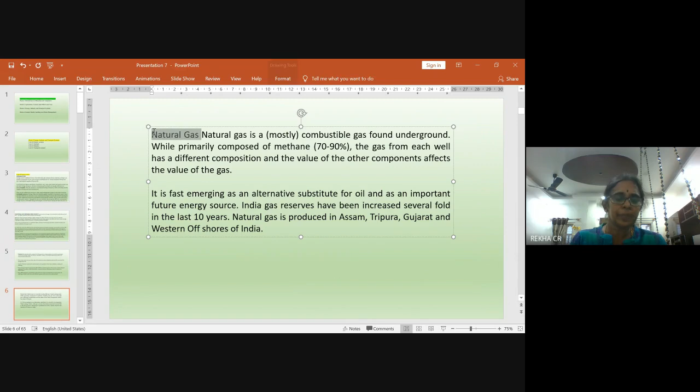So the third one is natural gas. Natural gas is a combustible gas found underground, and it is primarily composed of 70 to 90% methane.

So, the gas from each well has a different composition, and the value of other components affects the value of gas. So, this natural gas is a fast emerging alternative substitute for oil and an important gas or energy source for future. So, India's gas reserves have been increased several fold in the last 10 years, and the natural gas is produced in Assam, Tripura, Gujarat, and western offshores of India.

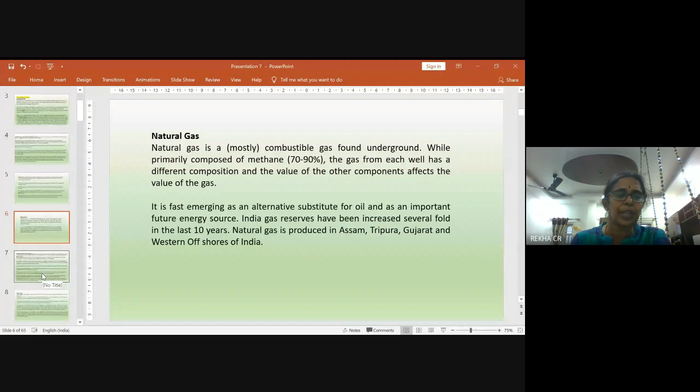So next coming to the renewable energy technologies or renewable energy sources. So the one which we studied is the non-renewable. So the renewable energy sources, it can be renewed like solar energy, wind energy, geothermal energy, tidal power, hydroelectric power, biomass, etc. So the first one is the wind energy.

Of course, it is an important alternative technology due to the developments in the turbine technology. The power generated from the wind-based turbines has increased significantly. So wind energy is one of the clean and sustainable energy resources. So though the windmills are utilized for energy generation, the development of wind energy or the new windmills, which are also called as wind turbines, appeared as early as 1890.

So today, the wind generated electricity is very close in cost to the power from conventional utility generation in some locations. So here in wind energy, the wind turbines use the kinetic energy of the wind and convert it into mechanical energy, which is converted into electricity by a generator. So large windmills are generally grouped together in a windy area, which is called a wind farm. So the windmills in a wind farm make it easier to feed the produced electricity into the power grid.

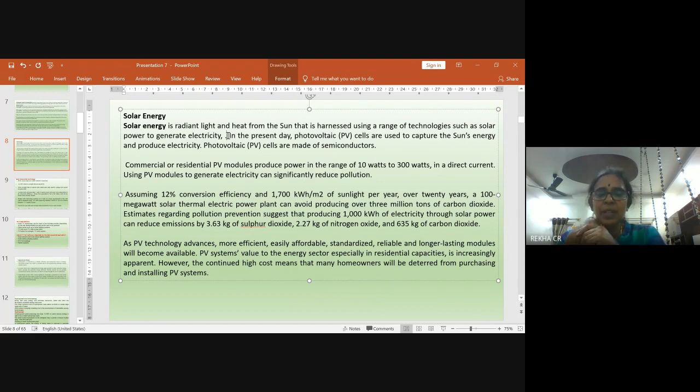So it can significantly reduce the pollution. So regarding pollution prevention, it suggests that producing 1000 kilowatt hours of electricity through solar power can reduce the emissions by 3.63 kgs of sulfur dioxide, 2.27 kgs of nitrogen oxide, and 635 kgs of carbon dioxide. So as PV technology advances, more efficient, easily affordable, reliable, and long-lasting modules will become available. So PV systems' value to the energy sector, especially in residential capacities, is increasing.

So next is the photovoltaic technology. Photo means light and voltaic stands for electricity. So SPV refers to sunlight derived electricity. See, when sunlight falls on special cells called solar cells, electric voltage and current is generated. So a single solar cell generates 1 watt of useful power and even more depending upon its conversion efficiency. So the power thus generated is fed to the battery and can be drawn whenever it is required.

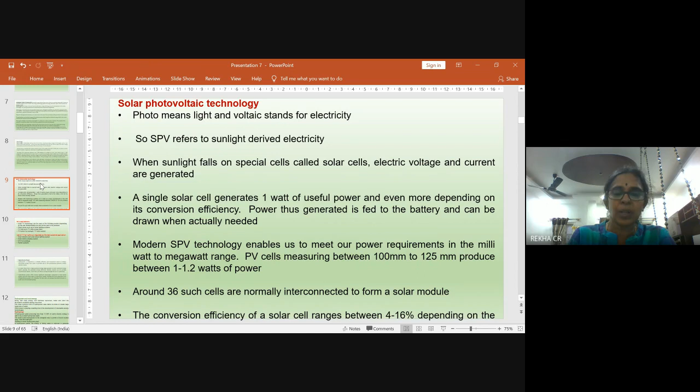So SPV technology enables us to meet our power requirements, and the PV cells measuring between 100 to 125 millimeters produce between 1 to 1.2 watts of power. So usually 36 such cells are interconnected to form a solar module. So the conversion efficiency of a solar cell ranges between 4 to 16% depending upon the cell technology used.

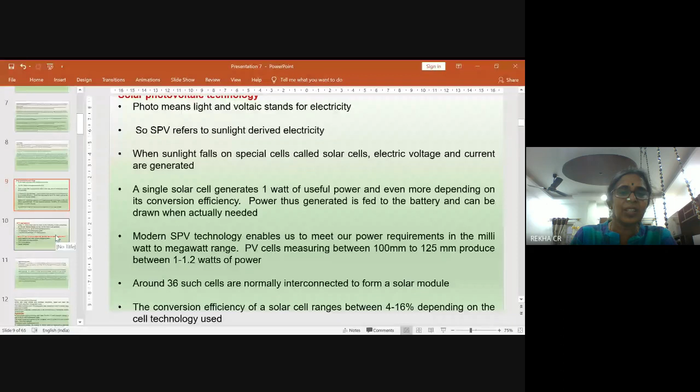So this SPV technology is used depending upon the site characteristics. It can stand alone in home lighting systems, PV grid as in PV utility power plant, PV hybrid, that is PV wind system. So it is used as lighting and it is found as the best possible application in the form of solar lanterns, solar street lighting system, solar water pumping system, SPV for buildings, hybrid systems, etc.

So next one is hydroelectric power. So hydropower is one of the efficient, reliable and economic sources of energy. So harvesting energy from water is possible due to the gravitational potential energy stored in water. So as the water flows from a high potential energy, that is high ground, to a low potential energy, the lower ground, the potential energy difference created is partially converted into kinetic and in this case electric energy through the use of a generator.

So hydroelectric power has several significant advantages compared to fossil-based power, and it is also significant when compared to the other sources of alternative energy. So next one, yes,

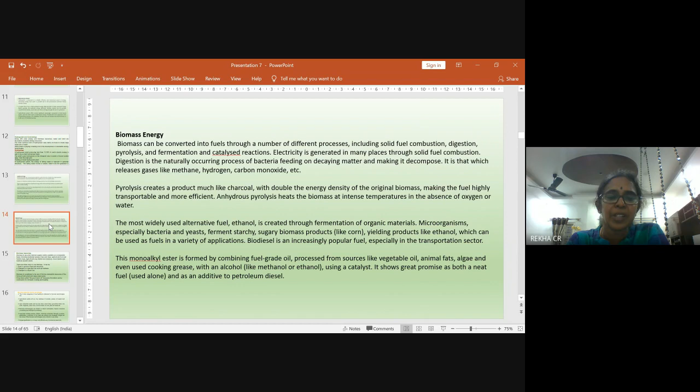So, the most widely used alternative fuel is ethanol, which is created through fermentation of organic materials. Microorganisms, especially bacteria and yeasts, ferment the starch, sugar, etc. It yields ethanol, which can be used as a fuel in a variety of applications. Biodiesel is an increasingly popular fuel, especially in the transportation sector. So these are some of the different types of energy.

So biomass resources: biomass is plant-derived organic matter available on a renewable basis, which includes energy crops and trees, agricultural food and fodder crops, agricultural crop waste and residues, wood waste and residues of aquatic plants. So there are different ways to use the biomass.

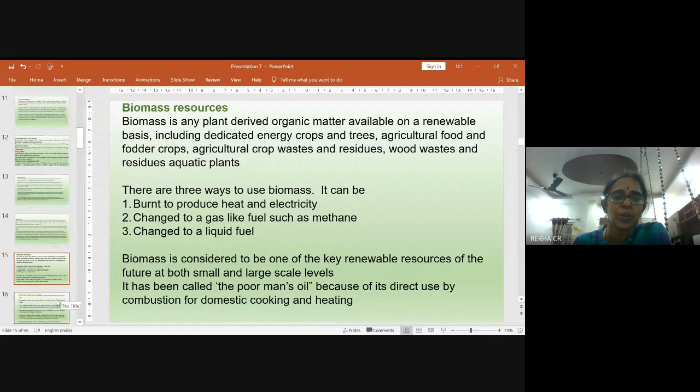It can be directly burnt to produce heat and electricity. It can be changed to a gas-like fuel such as methane, or it can be changed to a liquid fuel. So it is one of the key renewable resources of the future at both small and large scale levels. It has got a number of advantages.

So these biomass technologies are based on direct combustion, thermochemical and biological processing. Improved cooking stoves, boilers, charcoal production through pyrolysis, gasification, production of biofuels like ethanol, biodiesel, biogas, are some of the biomass technologies and products which are used today. Biomass gasification is a cheap and efficient way of producing electricity.

So next one is hydropower, which we have discussed. Along with solar energy and biomass resources, we have water and wind abundantly, which can be used as energy sources.

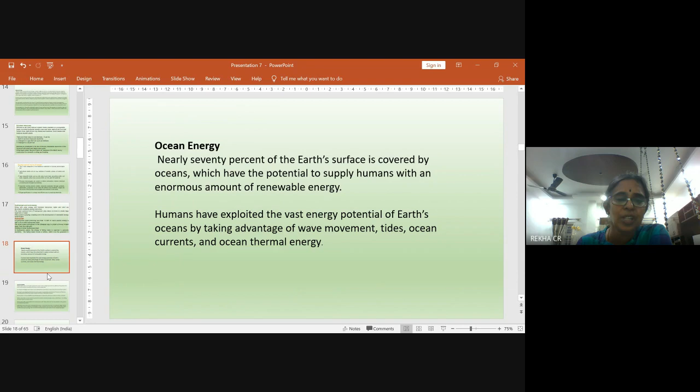So next one is ocean energy. 70% of the Earth's surface is covered by oceans, which have the potential to supply humans with an enormous amount of renewable energy. Humans have exploited the energy potential of Earth's oceans by taking advantage of wave movement, tides, ocean currents, and ocean thermal energy. So next one is nuclear energy.

Nuclear energy is the use of nuclear reactions that release nuclear energy to generate heat, which most frequently is used in steam turbines to produce electricity in a nuclear power plant. Nuclear power can be obtained from nuclear fission, nuclear decay, and nuclear fusion reactions. Presently, the majority of electricity from nuclear power is produced by nuclear fission of uranium and plutonium. Generating electricity from fusion power remains the focus of international research.

So nuclear power is also a clean and efficient way of boiling water to make steam, which turns turbines to produce electricity. Nuclear power plants use low enriched uranium fuel to produce electricity through a process called fission, the splitting of uranium atoms in a nuclear reactor.

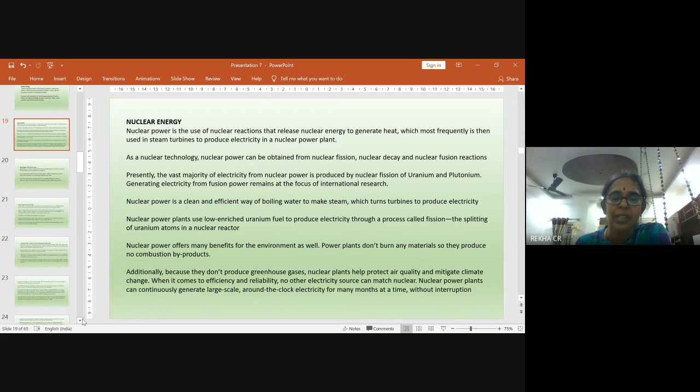Nuclear power offers many benefits for the environment. The power plants don't burn any materials, so they produce no combustion byproducts, and they do not release any greenhouse gases. So it protects the air quality and it mitigates climate change. Nuclear power plants can continuously generate large-scale, around-the-clock electricity for months at a time without any interruption.

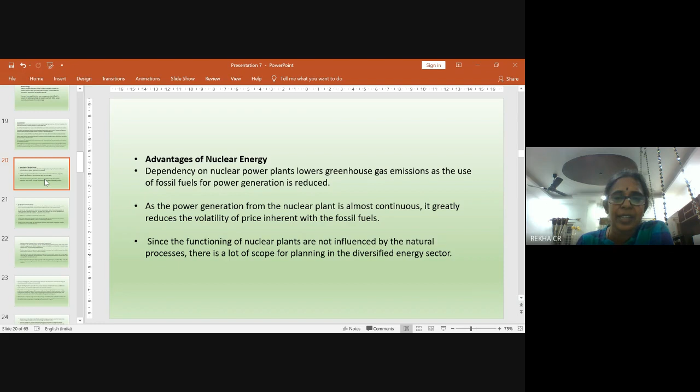So what are the advantages of nuclear energy? Power generation is there 24 hours, and it is not influenced by natural processes. There is a lot of scope for planning and a diversified energy sector, and there is no greenhouse gas emission. So what are the disadvantages?

Disadvantages of nuclear energy. See, fossil fuels are used mostly in road transport and mobility infrastructures, so switching over to nuclear power generation may not reduce fossil fuel use in the transport sector. In spite of all safety precautions in nuclear power plants, there is a probability of nuclear accidents. The nuclear accidents at Chernobyl and Fukushima highlighted the vulnerability of the plants to accidents, particularly due to human error.

Nuclear power plants have a limited lifespan, and the establishment of the plants must be technically feasible and economically feasible too. The use of nuclear energy and establishment of nuclear plants involves dependency on other countries for nuclear fuel and technology.

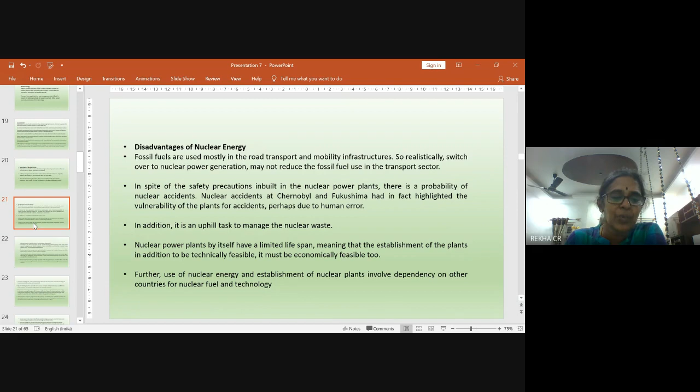So, diversification in energy supplies: perspectives from India. According to the Central Electricity Authority, India's total power capacity is pegged at over 300,000 megawatt, of which 42,850 megawatt is contributed by renewable energy projects and 42,783 megawatt by hydropower projects. Experts from the energy sector are of the opinion that India is very much on its path to become one of the world's leading producers of green energy.

India has diverse sources of power generation ranging from conventional sources such as coal, lignite, natural gas, oil, hydropower, nuclear power, to non-conventional sources like wind, solar, agriculture, and domestic waste. The demand for electricity has been increasing rapidly due to the increase in population. To cater to the increasing demand, massive additions in the existing generation capacity are required. The shift from fossil fuels to renewable energy sources is due to environmental impact, and these sources of energy are clean and sustainable.

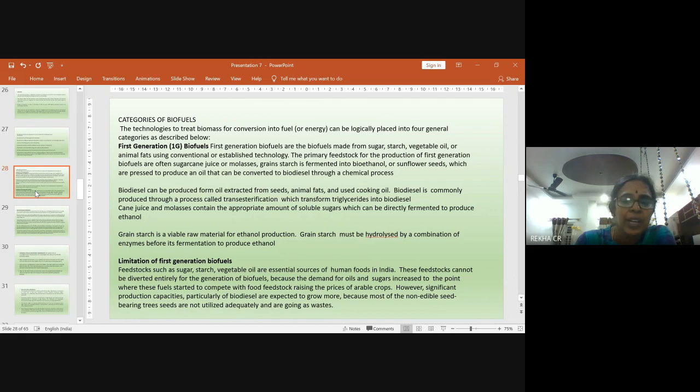However, significant production capacities, particularly of biodiesel, are expected to grow more because most of the non-edible seed bearing tree seeds are not utilized adequately and they are going as waste.

The second one is second generation biofuels, called 2G biofuels. They are produced from non-food crops, which include lignocellulosic biomass, crop residues, or waste biomass in the form of straw and stalks of wheat, rice, corn, etc. Biomass feedstock can be converted into different fuels using a range of processes for cost-effective biofuel production, such as biomethanol, bio-DME, Fischer-Tropsch diesel, biodiesel, mixed alcohol, bio-oil, biohydrogen, syngas, biogas, etc.

So lignocellulosic biomass is one of the most abundant plant materials on earth. It is obtained from farm residues, the organic fraction of municipal solid waste, and industrial and urban residues. The chief fraction of this biomass, typically on the order of 35 to 50%, is a glucose polymer known as cellulose. Next, 22 to 35% is hemicellulose. Depending upon the distribution of these sugars, the biomass also varies. The third most significant fraction, 15 to 25%, is lignin.

So the biomass consists of cellulose, hemicellulose, and lignin, and these components cannot easily be broken down to form sugar molecules. Other compounds such as plant oils, proteins, and ash make up the remaining fraction of the lignocellulosic biomass structure.

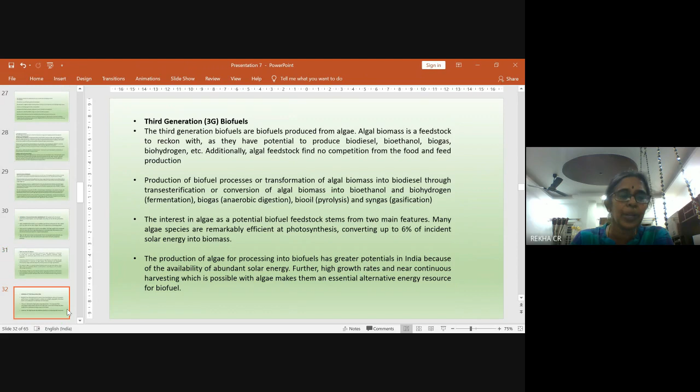So, many algae species are remarkably efficient at photosynthesis, which has the ability to convert the incident solar energy into biomass. So, the production of algae for processing into biofuels has a greater potential in India because of the availability of plenty of solar energy. So, the high growth rates and near continuous harvesting possible with algae make them an essential alternative energy resource for biofuel.

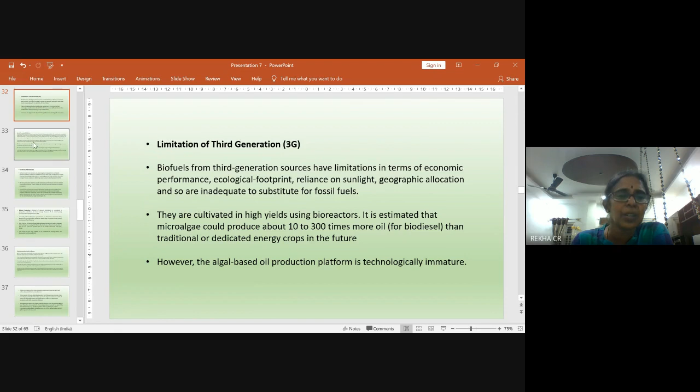So, the limitation for this third generation biofuel: the biofuels from the third generation sources have limitations in terms of economic performance, ecological footprint, reliance on sunlight, geographical allocation, and are inadequate to substitute for fossil fuels. So they are cultivated in high yields using bioreactors. It is estimated that microalgae could produce about 10 to 300 times more oil than the traditional or dedicated energy crops in future. But still, algal based oil production is a technologically immature technology.

So next one is 4G, that is the fourth generation biofuels. The fourth generation biofuels are a step further from the third generation biofuels. It is mostly based on metabolic engineering, a powerful tool to improve biofuel production, either through genetic modification to increase the carbon dioxide capture and lipid production, as well as to develop low input fast growing energy crops with reduced fertilizers, insecticides, and water requirements.

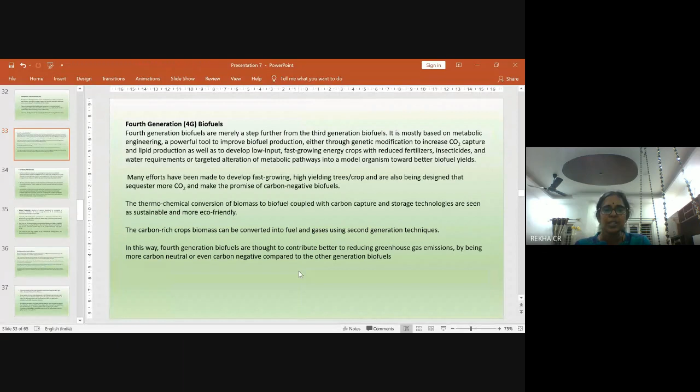Many efforts have been made to develop fast growing, high yielding trees designed to sequester more carbon dioxide and make the promise of carbon negative biofuels. So, the thermochemical conversion of biomass to biofuel, coupled with carbon capture and storage technologies, is seen as sustainable and more eco friendly. The carbon rich crops can be converted into fuel and gases using second generation techniques.

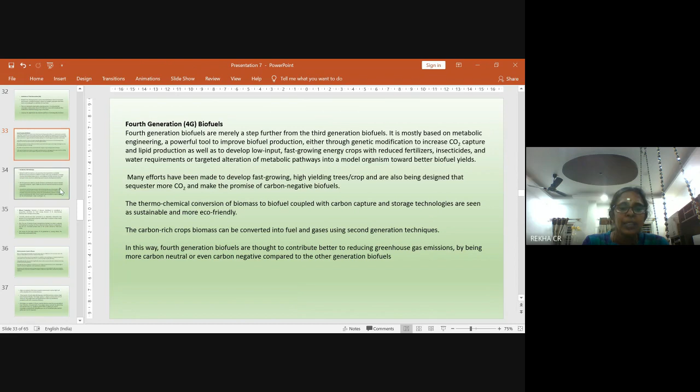So by this way, the fourth generation biofuels contribute better to reducing greenhouse emissions by being more carbon neutral or even carbon negative compared to the other generation biofuels. So biofuels made from biomass are attracting increasing interest worldwide. They can fulfill the energy needs and contribute to energy security, mitigation of greenhouse gas emissions from the transport sectors, and also deliver rural economic development benefits.

So the first generation has specific limitations, and feedstocks used for biofuels, especially the food grains, sugars, edible oil, etc., these food substances cannot be diverted entirely for biofuel production. The second and the third generation technologies have enormous potential because they are produced from biomass feedstock, that is residues and waste materials, and can be converted into varieties of biofuels.

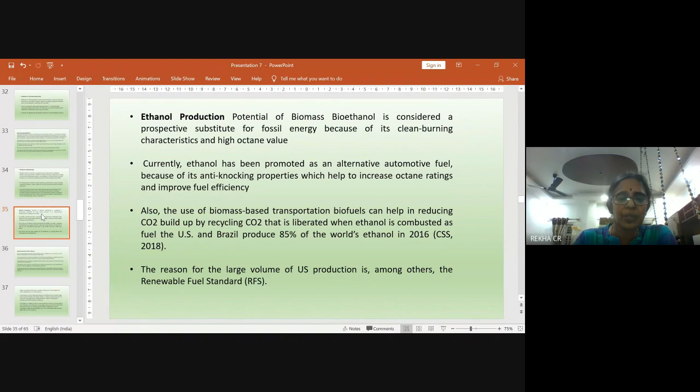So next one is ethanol production. Biomass bioethanol is considered as a substitute for fossil energy because of its clean burning characteristics and high octane value. Biomass based transportation biofuels help in reducing carbon dioxide buildup by recycling the carbon dioxide that is liberated when ethanol is combusted as fuel. The reason for the large volume of US production is the renewable fuel standard.

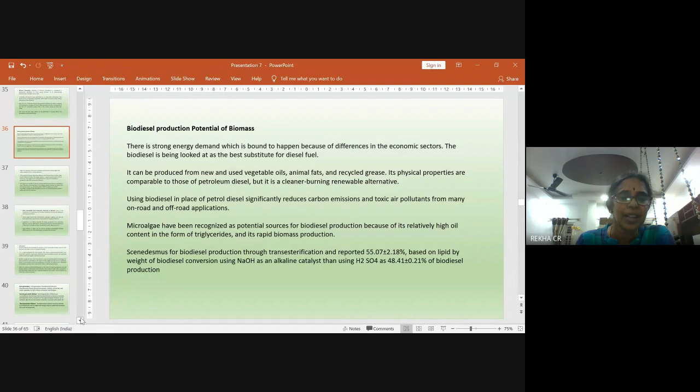So, biodiesel production potential of biomass. There is a strong energy demand which is bound to happen because of the difference in the economic sectors. Using biodiesel in place of petrol diesel significantly reduces the carbon emissions and toxic air pollutants from on road and off road applications. Microalgae have been recognized as a potential source for biodiesel production because of their high oil content in the form of triglycerides and rapid biomass production.

So algae are organisms that grow in aquatic environments using light and carbon dioxide. Many species of green algae like Spirogyra and Chlorococcum contain high levels of polysaccharides, and these are capable of growing all year round using non-agricultural land. Therefore the oil productivity of microalgae exceeds the yield of the best oil seed crops.

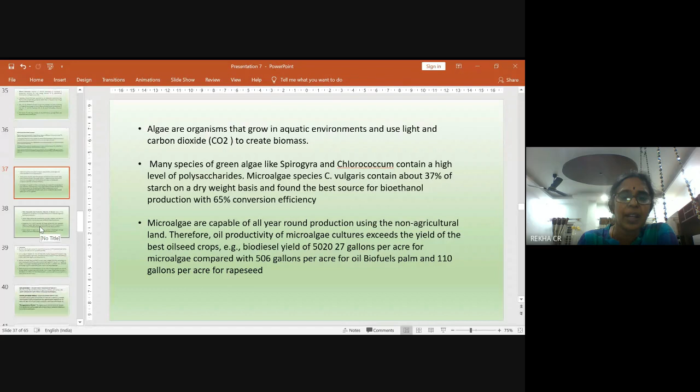So the other renewable fuel production potential of biomass includes the seaweeds. Seaweeds are considered as an excellent feedstock for anaerobic digestion and biogas production. Various algae species like Scenedesmus, Spirulina, Euglena, and Ulva have been reported as a good source and suitable for biogas production. Some of the green algal species like Chaetomorpha litorea, with the generation of 80.5 liters of biogas per kg of dry biomass under 299 psi pressure.

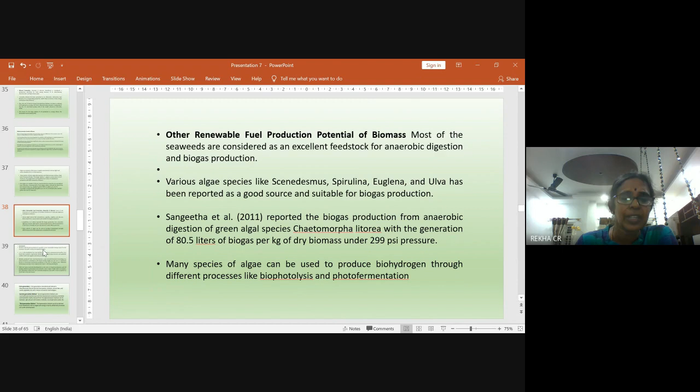So there are a number of algae and seaweeds which can be used as a potential source of biofuel. So to conclude the second unit, biofuels hold the greatest potential to provide a more sustainable energy source for the transport and other sectors if produced sensibly.

And biofuels offer several environmental benefits over fossil fuels. 1G biofuels raise increasing concern over potential conflicts with food supplies and land production. So 2G and 4G biofuel technology has been reviewed to contribute to future energy, and there are many successful developments in the areas of enzyme production and cell biology related to generating more biofuels, and it will further reduce the cost of biofuel production and make it more competitive with fossil fuels in the near future.

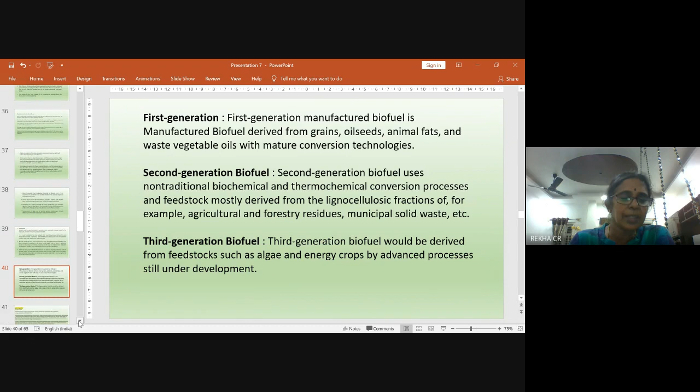So this was about the second unit. The third unit is industry. Industrial processes are highly energy intensive, and they account for approximately 30% of global energy consumption. So industrial processes and technologies are driven by energy. Industrial processes such as metal smelting and chemical manufacturing, in addition to using enormous amounts of energy, emit greenhouse gases like methane and nitrous oxide. Fertilizer plants, iron and steel industries, petroleum refining plants, cement factories, and paper and pulp are the important energy consuming industries.

Socio-economic development drives energy consumption through rising production in industrial subsectors like iron and steel, pulp and paper mills, etc. In this decade, India has experienced its highest growth rate in industrial energy consumption, while China experienced remarkable growth in the industrial sector. So an in-depth study of industrial sectors would throw light on life cycle emissions to reduce the waste generation occurring during manufacturing and construction, and on developing strategies to adopt circular economy based industrial initiatives. So in this unit, we are going to discuss the potential of the industrial sector in climate change mitigation.

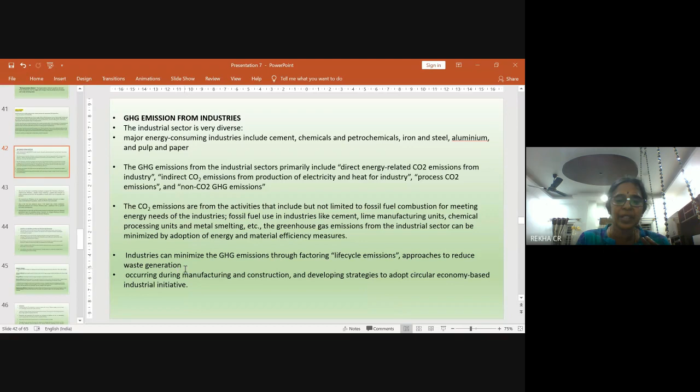Greenhouse gas emissions from the industrial sector can be minimized by adopting energy and material efficiency measures. Industry can minimize GHG emissions through life cycle emissions approaches to reduce the waste generation occurring during manufacturing and construction, developing strategies, etc. So the need of the hour is to develop strategies to improve emissions efficiency, material use efficiency, and product service efficiency, coupled with measures to reduce demand and increase the possibility to recycle and reuse materials and products. Material use efficiency can be augmented by following certain measures to reduce scrap and designing new products which are efficient and sustainable.

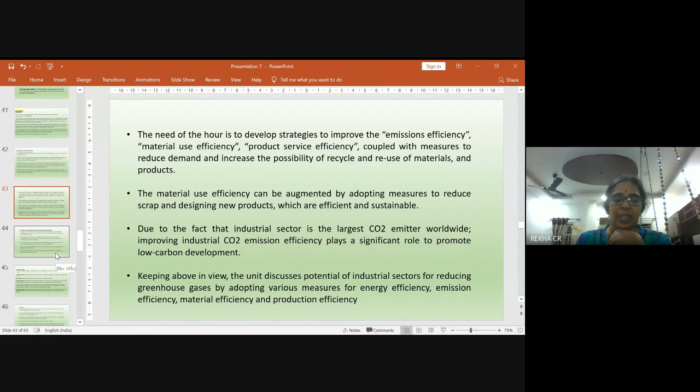The industrial sector is the largest carbon dioxide emitter worldwide. So improving industrial carbon dioxide emission efficiency plays a significant role in promoting low carbon development. Keeping this into account, this unit discusses the potential of industrial sectors for reducing greenhouse gases by adopting various measures for energy efficiency, emission efficiency, material efficiency, and production efficiency.

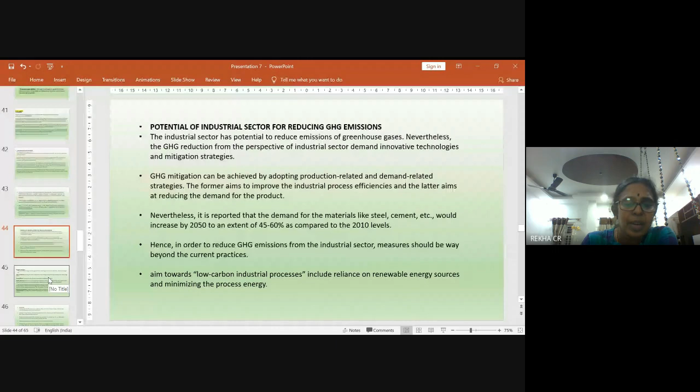GHG reduction from the industrial sector demands innovative technologies and mitigation strategies. It can be achieved by adopting production related and demand related strategies. Production related strategies aim to improve industrial process efficiencies, and demand related strategies aim at reducing the demand for the product. The demand for materials like steel, cement, etc. would increase by 2050 to an extent of 45 to 60% as compared to 2010. Hence, in order to reduce GHG emissions from the industrial sector, measures should go way beyond current practices. The aim towards low carbon industrial processes includes reliance on renewable energy sources and minimizing process energy.

So, what are the mitigation strategies? Production related strategies are mainly geared towards improving industrial process efficiency. The three main strategies are emission efficiency, energy efficiency, and material efficiency. Emission efficiency: reducing the amount of emissions per unit of energy used by switching to low carbon energy sources. Energy efficiency: improving the ratio of energy consumption to production of materials. Material efficiency: reducing the amount of raw material needed to create a product.

Demand related strategies are focused on reducing the overall use of product material by changing the demand for industrial products. These strategies include reuse, recycling, substitution with less energy and GHG intensive materials, and using materials more efficiently. The demand related strategies include product service efficiency: using products for longer and more intensely can help to reduce the amount of product created.

And the demand reduction, reducing the overall demand for new products, for example through reuse and recycling, will reduce the emissions. So to conclude the third unit, limiting industrial carbon dioxide emission is crucial to reduce the risk of climate change, but it looks very challenging and warrants policy attention.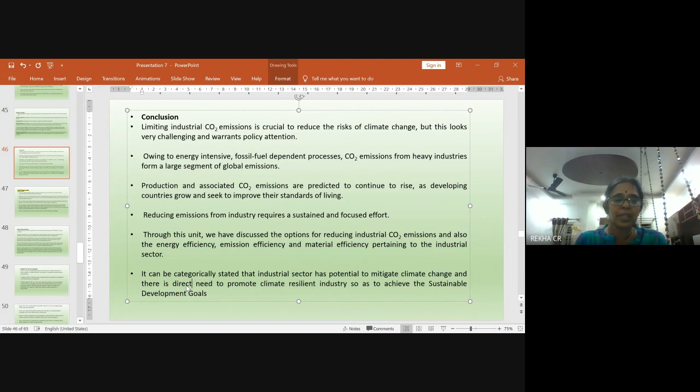So the options for reducing industrial carbon dioxide emissions and also the energy efficiency, emission efficiency pertaining to the industrial sector have been discussed in this unit. The industrial sector has potential to mitigate climate change, and there is a direct need to promote climate resilient industry in order to achieve the sustainable development goals. So this is about the industry where it can reduce the greenhouse gas emission, especially the emission of carbon dioxide.

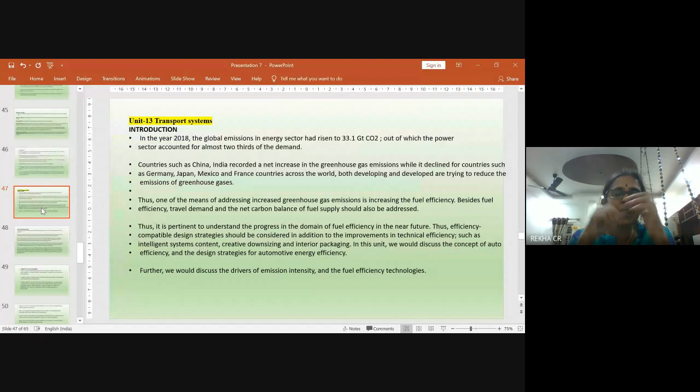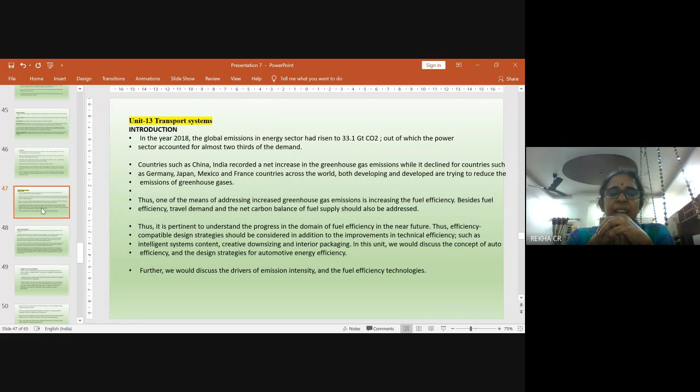So the thirteenth unit is transport system. In the year 2018, the global emissions in the energy sector have risen, out of which the power sector accounted for almost two-thirds of the demand. Countries such as China and India recorded a net increase in greenhouse gas emission, while it declined for countries such as Germany, Japan, Mexico, France. Across the world, both developing and developed countries are trying to reduce the emission of greenhouse gases.

So one of the means of addressing the increased GHG emissions is increasing the fuel efficiency. Apart from fuel efficiency, travel demand and the net carbon balance of fuel supply should also be addressed. In order to understand the progress in the domain of fuel efficiency in the near future, efficiency compatible design strategies should be considered in addition to the improvements in technical efficiency. Further in this unit, we are going to discuss the drivers of emission intensity and fuel efficiency technologies.

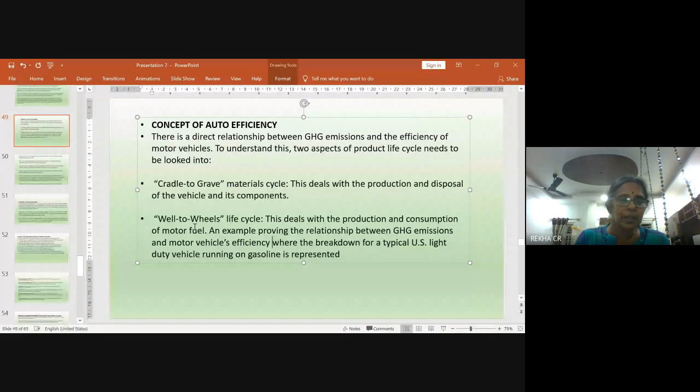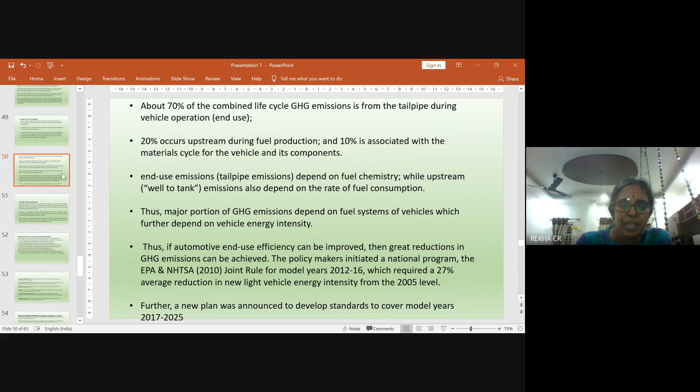Further, a new plan has been announced to develop the standards to cover the model years 2017 to 2025. So, efficiency and GHG emissions. Although auto efficiency is an important parameter, it alone cannot address the energy and climate issues. Automobiles are not the sole mode of transportation. Besides their efficiency, travel demand and the fuel supply system determine the oil demand and GHG emissions.

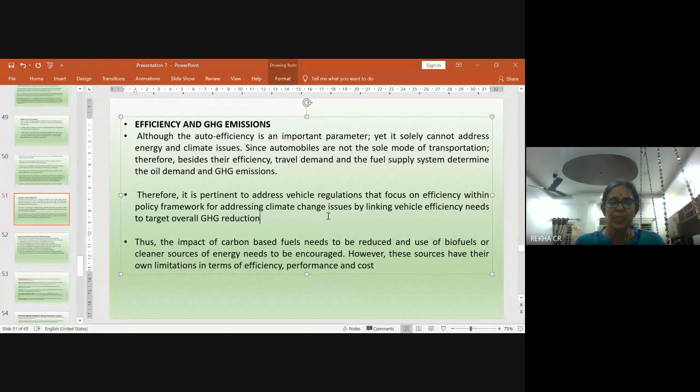So vehicle regulations, which focus on efficiency within a policy framework for addressing climate change issues, need to link vehicle efficiency to the overall greenhouse gas reduction target. The impact of carbon-based fuels needs to be reduced and the use of biofuels or cleaner sources of energy needs to be encouraged. But these sources have their own limitations in terms of efficiency, performance, and cost.

So the design strategies for automotive energy efficiency. Firstly, to develop a set of baseline vehicle classes, either real or theoretical, that will possess the attributes of that class. The second one, to identify the technology which reduces the fuel consumption.

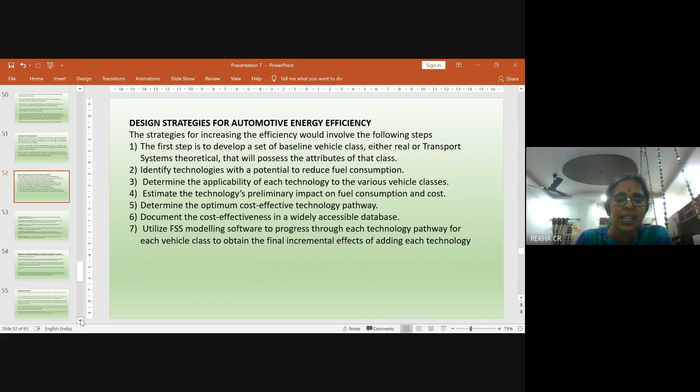Third, to determine the applicability of each technology to the various vehicle classes. Fourth, to estimate the technology's preliminary impact on fuel consumption and cost. Determine the optimum cost effective in a widely accessible database. Utilize FSS modeling software to progress through each technology pathway for each vehicle class to obtain the final incremental effects of adding each technology.

So you have different types like full system simulation, original equipment manufacturers, trade-offs, calibration, partial discrete approximation, simulation models, etc. So the technology assessment, incremental approach versus fundamental analysis. The technology assessments are carried to support to set the standards working from make and model level data characterizing technology modifications. The fundamental approach focuses on clean vehicle designs, improved performance levels, and efficiency potential.

So, various studies have been carried out from time to time to study the incremental approach as well as fundamental analysis. So, with the advancement of technology, it is estimated to triple the fuel efficiency by 2035 to increase the performance of the vehicles. So, although this program was terminated before its fruitful realization, yet PNGV concept cars using diesel hybrid powertrains were publicly displayed in January 2000.

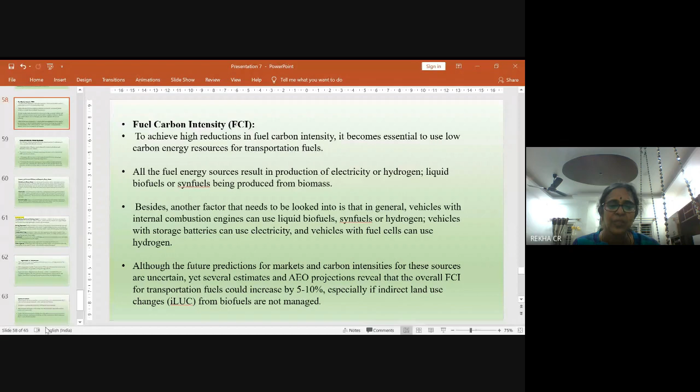So although the future prediction for markets and carbon intensity for these sources are uncertain, yet several estimations and AEO projections reveal that the overall fuel carbon intensity for transportation fuels could increase by 5 to 10%, especially if indirect land use changes from biofuels are not managed. So the light duty vehicles represent the largest portion of the world transport energy use and carbon dioxide emission.

So in order to reduce the fuel use and the GHG emission in vehicles, you can improve the conversion of fuel energy into useful work by improving the drivetrain efficiency and recapturing energy losses to reduce the loads from aerodynamic forces, rolling resistance, and losses associated with accelerating the vehicle and hill climbing that the vehicle must overcome.

So increasing the drivetrain efficiency and recapturing energy losses is by minimizing the energy losses: idling losses, drivetrain losses, overcoming inertia and braking losses, rolling resistance, aerodynamic drag, accessories, etc.

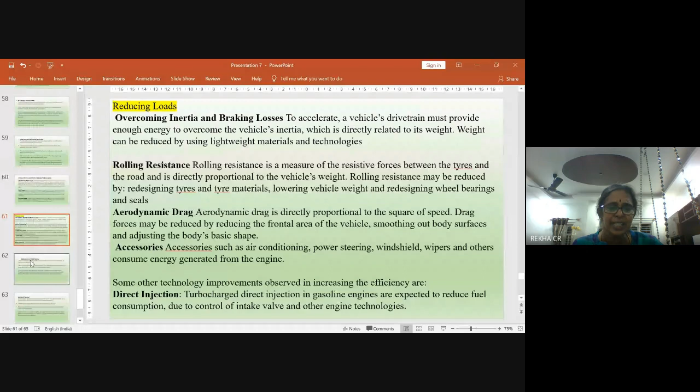So some other technology improvements observed in increasing the efficiency are: first one is direct injection. Turbocharged direct injection in gasoline engines is expected to reduce the fuel consumption, to control the intake valve and other engine technologies. The advanced 6 and 7 speed automatic transmissions are being introduced for fuel economy improvements.

Continuously variable transmissions that had been earlier limited to low power drivetrains are gradually moving into large vehicles. The hybrid electric drivetrains combine a conventional internal combustion engine with an electric drivetrain, and the battery is recharged by regenerative braking and engine charging.

So hybrid drivetrains combine a conventional internal combustion engine with an electric drivetrain, and plug-in hybrids obtain part of their energy from the electrical grid. And further, hybrids save energy by shutting down the engine, using the motor to boost power during acceleration, shifting power steering and other accessories to electric operation, that is more efficient operation.

So implications of climate cooperation: IPCC reports on climate change have been continuously highlighting the rising GHG emissions. So new technologies are required not only to meet the growing demand for vehicles, but also to reduce the impact on energy intensity in the transportation system.

A good example is the electric vehicles, including the battery electric vehicles and plug-in hybrid electric vehicles, which are fully or partially driven by electricity and thus emit less greenhouse gas. So the solution calls for cooperation among the countries of the world to minimize the impact of climate change.

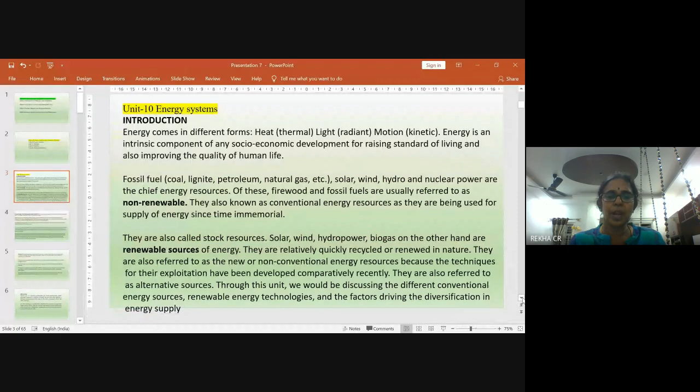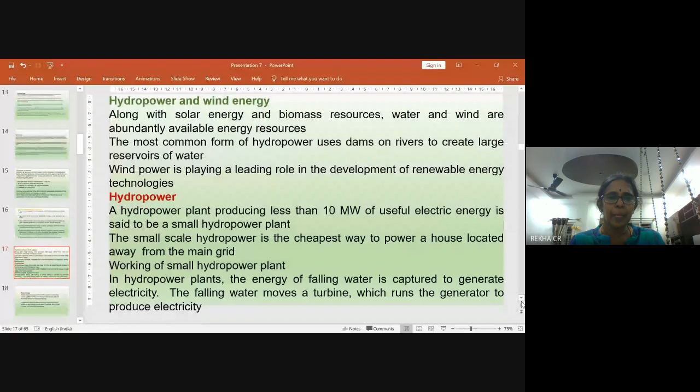So, this is about the third block of AVV 023, that is energy, industry, and transport system. This block 3, as we know, has 4 units. First one is energy systems, which focuses on renewable and non-renewable sources. The non-renewable sources are petroleum, coal, natural gas; renewable energy resources are wind energy, solar energy, hydropower, hydroelectric power, geothermal, biomass energy, ocean energy, nuclear energy. So this is about the first unit, that is energy.

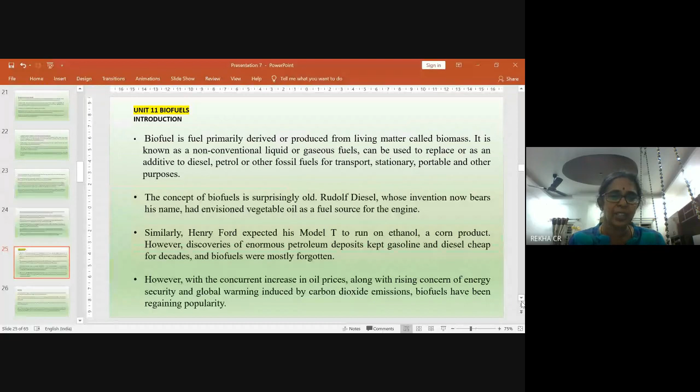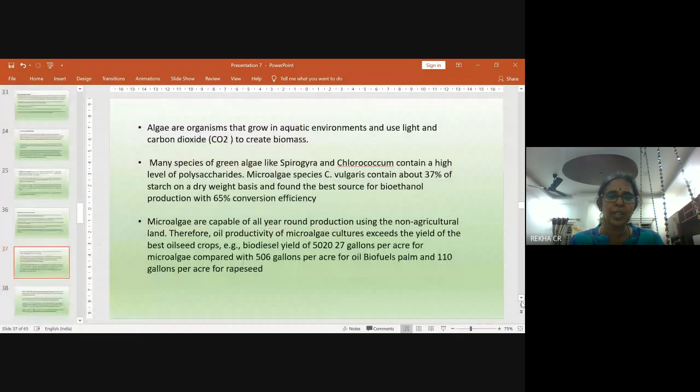Second one is biofuels. You have different types of biofuels: first generation, second generation, third generation, fourth generation biofuels, and each one has its own advantages and limitations. And the biodiesel production potential of biomass, then the conclusion of the second unit. Then the third unit is regarding the industry.

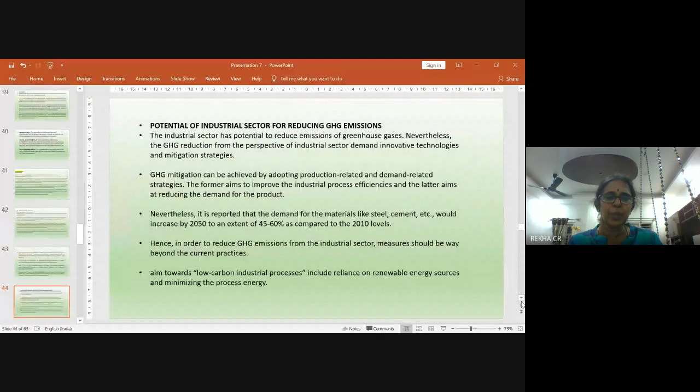So here we have to study the industrial processes, the various industries which emit greenhouse gases, how to mitigate and adapt to these gases, the GHG emission from industries, then the potential of the industrial sector for reducing greenhouse gas emission. Mitigation strategies include emission efficiency, energy efficiency, and material efficiency.

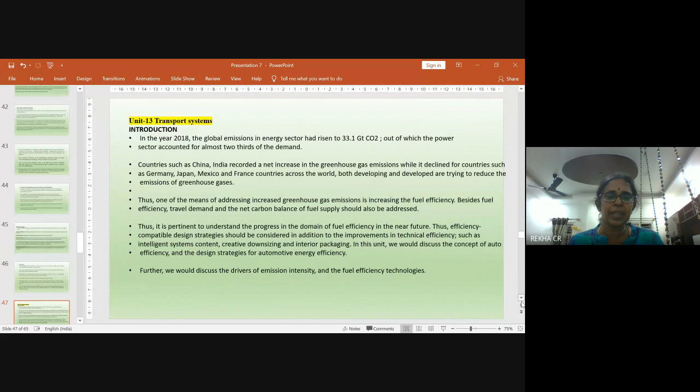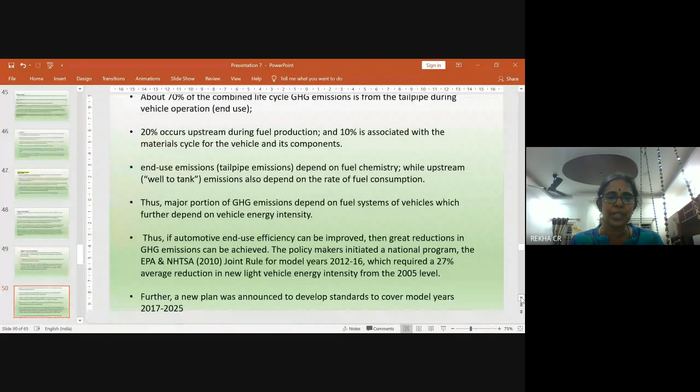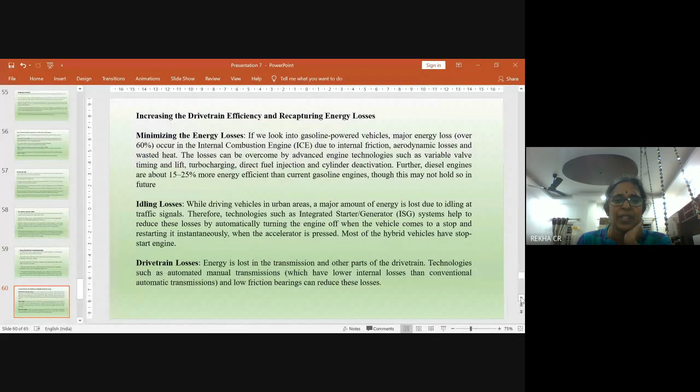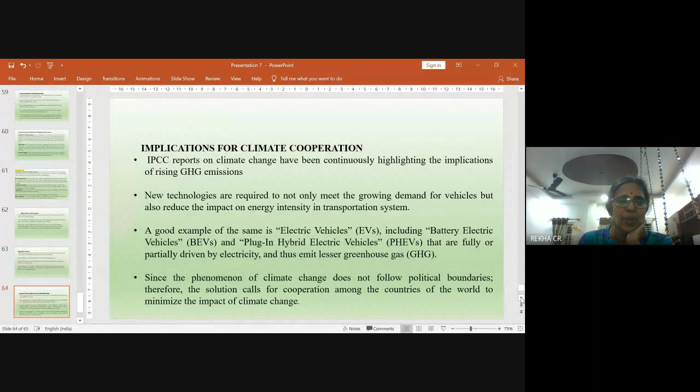The next unit is the transport systems: global energy emissions, concept of auto efficiency and GHG emissions, design strategies for automotive energy efficiency, then technology assessment, incremental approach versus fundamental analysis, emission intensity, then drivers of emission intensity, that is the energy intensity, fuel mix and fuel carbon intensity, fuel efficiency technologies, increasing the drivetrain efficiency and recapturing the energy losses, the improvement in transmission, hybrid drivetrains, implications for climate cooperation, etc.

So today we have discussed the third block, that is energy, industry, and transport system. Tomorrow at the same time, that is at 6 o'clock, we are going to discuss the last block, that is block 4 of MEV 023, human health, building, and waste management. So tomorrow we shall discuss the last block of MEV 023.